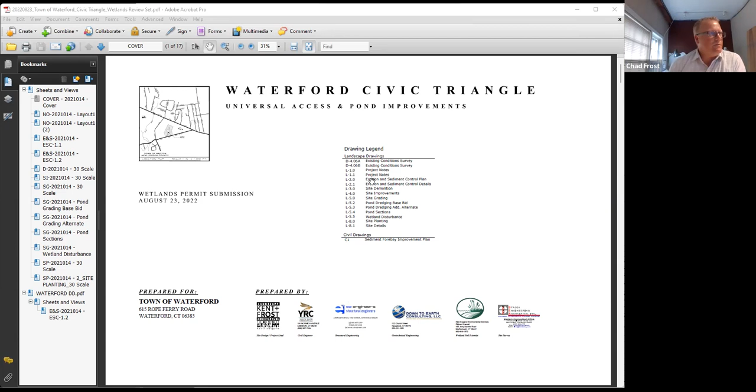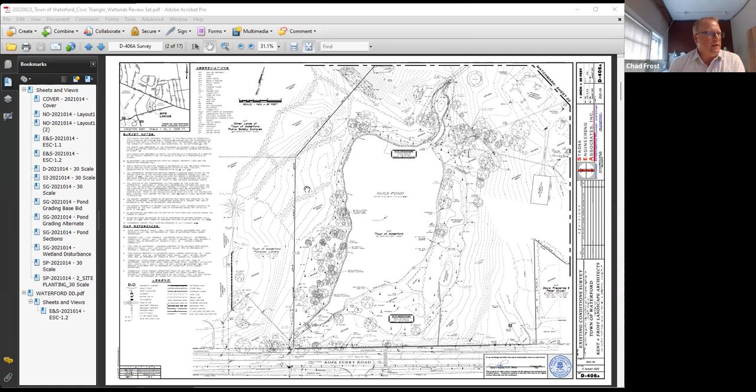These are the wetland plans that we submitted to the town back on the 23rd. That's the cover sheet, this is the survey, which you've seen, it's been updated since right before we were submitting. There was some additional information needed around the periphery, so the playground, the bathrooms, and some additional topo were picked up, which we needed for the submission. This is an additional piece of the survey, getting a little further up into the parking lot.

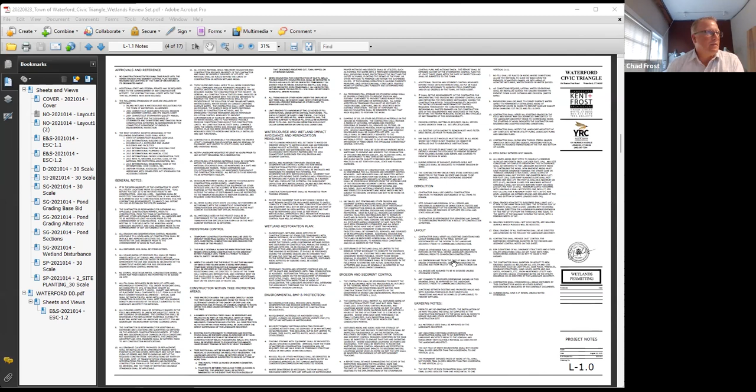We included a whole bunch of notes - I'm not going to go through all these, but there's everything from our typical general notes to pedestrian controls during construction, the tree protection plan during construction, the wetland watercourse avoidance and minimization measures, the wetland restoration plan, environmental best management practices, E&S controls, demolition, layout, grading. So a whole bunch of notes there that I'm not going to go through right now, but they're present, along with our typical legend of all the different symbols in the plan set.

What I'll do real briefly - effectively there's been very little change since the last time we met. Planimetrically, everything is where it was previously. The walks are the same. We've made a minor tweak where the walk connects to the playground for a grading perspective. The forebay we've talked about is still there, all the walks are there. It was really just a matter of calculating impacts and trying to minimize them and finish all the details.

This is our erosion and sedimentation control plan with all the different measures we're putting in throughout the place. What I'll point out on this plan, as we've talked about, is the moving of the muck, the dredging of the pond. As we start dredging, we're moving that muck to a first stockpile within the pond, then moving it to the secondary dewatering right outside the pond, and then taking it up the hill to its final dewatering area adjacent to the skate park and the police station, as we've discussed. So that's the three-stage move.

The other thing that might have come up since July, in our dewatering plan, before we had a silt sack to pump all the water through and deal with turbidity. We've now made this a much more robust settling detention basin. It's a 2-cell process, so the water gets pumped out of the pond, goes into a large settling area, filters through a stone check dam into a secondary settling area before eventually being released through 2 different measures back into the stream and going downstream.

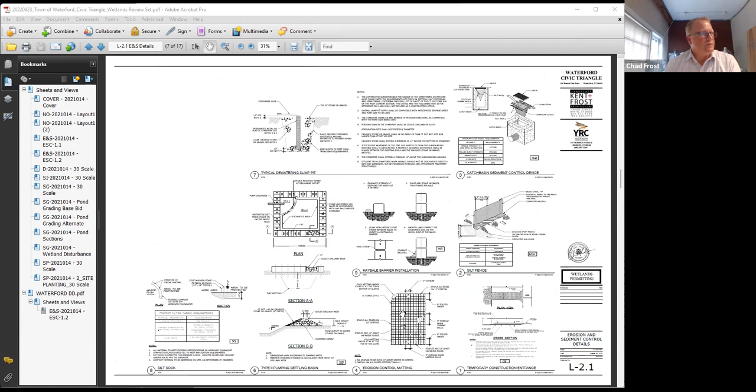Site demolition - again, hopefully nothing drastically new. All these hatched areas are where we're having to strip topsoil. All the X's are trees to be removed. This is the area next to the pond that's over vegetated that we're going to thin out and selectively remove the small and overpopulated trees to reduce the amount of vegetation falling and getting back into the pond.

And then you can just see kind of the area of influence. I'll note that we have noted - if I can zoom in a little bit, might make it a little easier for you. I can do that.

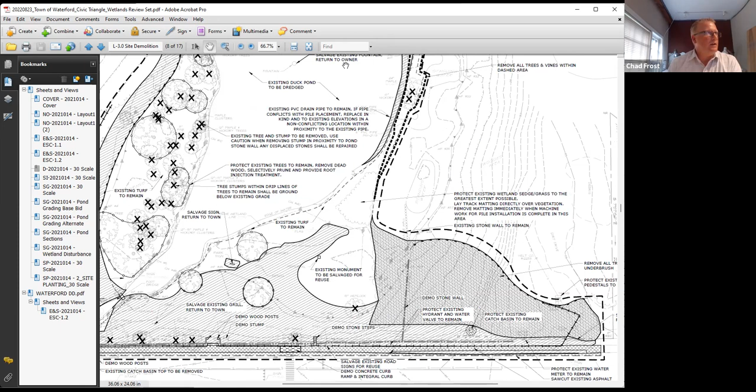The notes: there's the existing sign we're salvaging for the moment, the existing memorial, the monument that we're going to reuse and build back into the plaza down here. And this is the area where it's currently wooded, and we're going to be removing all those trees to improve the visual access. So again, I don't think anything new that we've talked about from a committee perspective, but just getting into the details of how we have to do it.

This is the improvement plan, similar to what you've seen effectively all along. There's just some more detail in here. I'll point out on the walkway down. So this is the playground. This is the existing walk to the bathroom.

So the walkway that now comes down the hill, we've added some drainage features along there because we do anticipate quite a bit of runoff coming down there. So we're accommodating that. We had some grading things to do down here, so there's some existing stone wall or existing large stones we're lining to make a stone wall to minimize the amount of grading we have to do. The boardwalk, the concrete path.

We've hatched some areas, that one in particular, and another one over here. These are the concrete areas where we have wetland soils below or adjacent to where the walk is doing, and we're just highlighting those because we are doing a little bit more of a robust base underneath of them so that we can make sure the soils support the walkway and we don't have settling issues down the road.

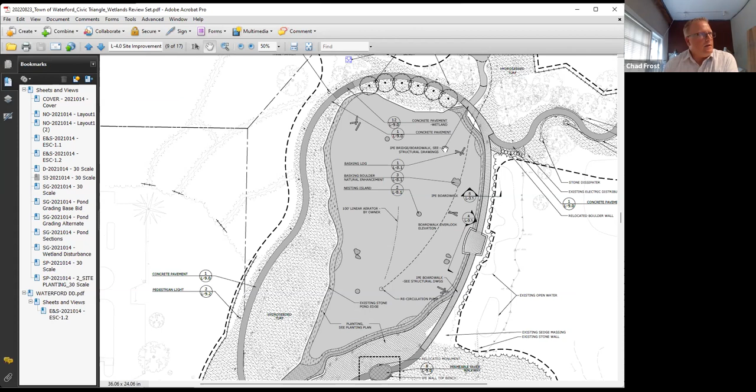And then the one new thing I'll point out, this came about in discussions with Rich Janarski, the wetland scientist. Within the pond, we've added some habitat restoration features. So we have these basking logs that we've set up a couple along the edge, both connecting to the edge of the pond as well as floated or stationed in the pond. These are for turtles, amphibians to be able to crawl up out of the water. Same thing with rock, and we've made some nesting islands for nesting birds to have a place of respite out within the pond.

Rich thought this would be a great addition as we did environmental improvements to the overall pond and water quality. We thought it was a great idea. We positioned quite a few of them, as you can see, kind of along the boardwalk, again for that visual and educational opportunities, thinking of how kids walking along the boardwalk would love to see the turtles and the frogs and everything like that.

The exact placement of this we will work out as we're actually doing the construction. Right now, we've pushed it far enough away to where we hope, for the most part, it's out of an area of disruption, so that if the turtles are basking on the log, it's not 2 feet away from the boardwalk and they're going to all flee. It's far enough out that they can continue to bask and the kids continue to watch them.

So that's kind of the only real improvement that we've made to the pond.

This is the grading plan. From a high level perspective, very little has changed. We got the additional grading that we needed up here to make sure we can make ADA access. From a committee perspective, what you should be aware of is this connects right up to the corner of the playground. It is fully ADA accessible, meaning below 5% all the way down this hillside, and the entire walk around it is really 1 to 2% for the most part. So very flat, very easy to do.

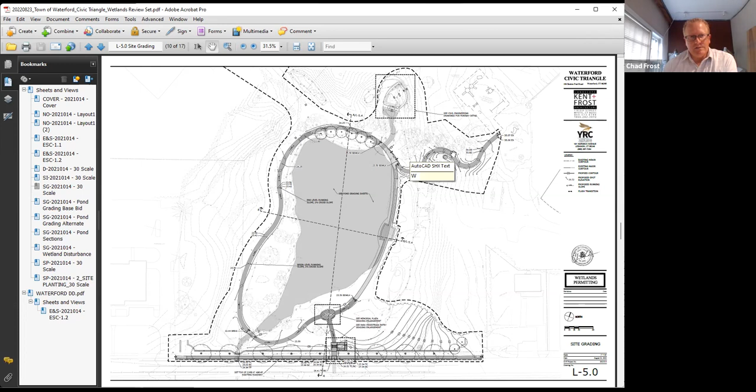Then we come across, we have a slight ramp up to get to the elevation of the boardwalk, and the boardwalk is level all the way across until it connects back. So the goal of attaining a universally accessible trail, we were definitely able to achieve and make that entire loop.

Otherwise, we did finalize the grading on this hillside. That's another potential thing that we finalized since we last saw the plans. There's a level area, a steeper slope, and then a softer slope down. We know we're going to disturb this whole area as we take out the trees and open it up visually.

This is where we're doing our construction staging and that sediment basin for the dewatering of the pond. So we've given the grading plan to make that a more even transition all the way down the hill, so visually it looks more appealing and it's easier for people to walk back and forth. This is where we expect, when this area needs to be mowed in the future, they can come in and go back and forth along that hillside much easier with this current grading plan.

The next two, this and the following plan, are the dredging plans for the pond. As we've talked about, because of budget constraints, we have our bare minimum of dredging, and that's this plan. I think you're all aware of the contaminated soil of the muck, this is that area we're leaving alone. So that's why the contours bulge out there, because that's the area we don't touch. This represents us scraping the muck out of basically the entire pond, a few inches here or there, depending on the base of the subgrade.

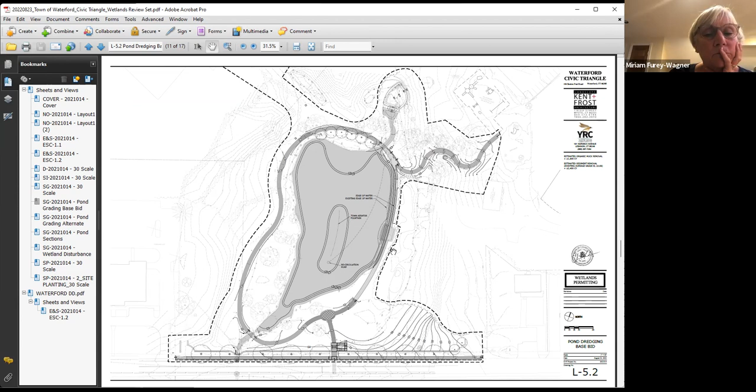Chad, who told you not to touch anything? That's our licensed environmental professional, the LEP, who did the environmental testing there. Just double checking who they was. Yeah, somebody who knows more about contaminated soils than I do. I was wondering if it was wetlands or somebody.

No, 100% based on that grid of testing that we did, and all the results that came back. Knowing most of that muck, what we found, just to refresh, was that it has some contamination within it that we can remove, but we have to handle it appropriately and dispose of it properly, meaning we can't just get rid of it on town property somewhere else.

And this was the one area that was recommended we just leave in place, and everything else, all the rest of the muck comes out, and then the bottom gets slightly regraded. I think it's where the lead is. No, it's not mobile the way it is.

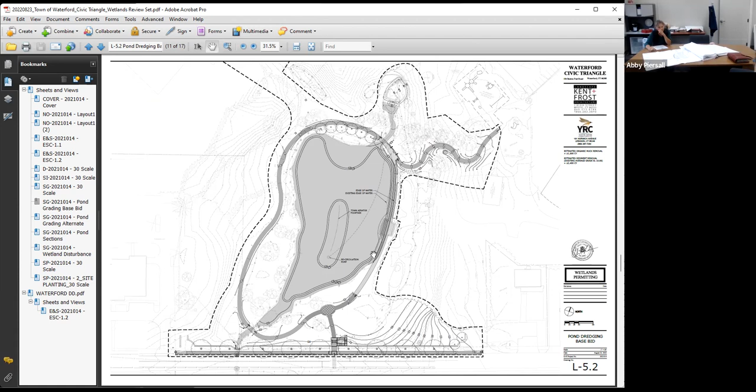So then, if budgets prevail and diesel prices drop and all that good stuff, this is the optimum dredging plan. I'll flip back to the other one. Again, you can see the shape. This is the optimum depth. Basically what we do is just expand that optimum depth out to here, so we get a much larger area of deep water in the center.

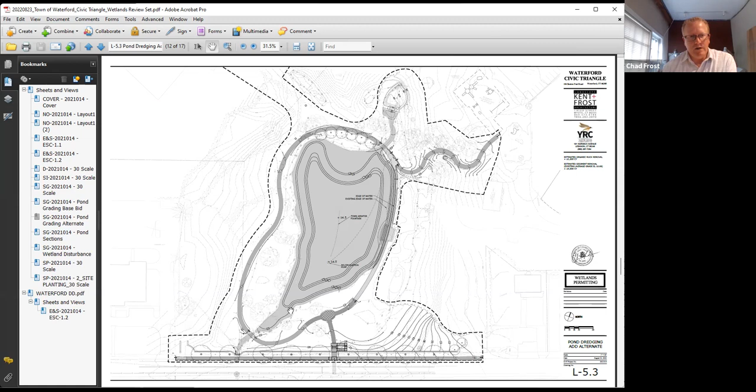Again, it's only about 6 feet deep, so it's not extremely deep, but it's deep enough to stay cooler. We do provide a shelf all the way around, so we have the first 5 feet we don't really touch. We take out the muck, but that's about it. Then we sculpt down. Then we have a shelf, which is right at that optimum level for aquatic plants to be able to live along that shelf. And then we go down another 3 feet to a little bit deeper water, and again have that aeration in the center.

So this would be the hopeful plan. We put it in there just so that the wetland committee understands that there's kind of an either-or scenario, so they know everything.

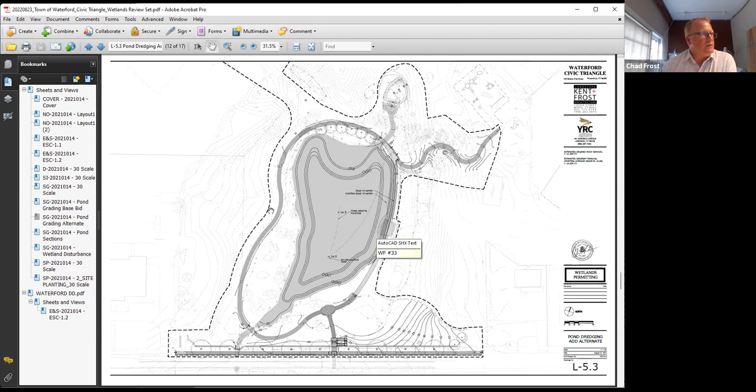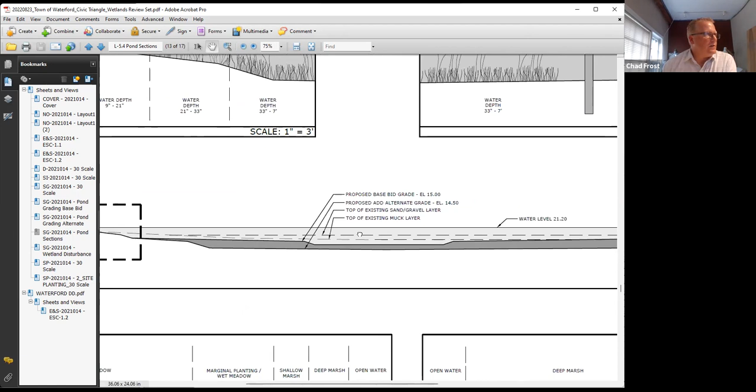These are our sections through the pond. I'll jump back, so we have a section cut right through here, and then another section going the long way. This top section is through the area over the pond, the little outdoor classroom. I'll try to zoom in a little bit so you can see the water level. That top dash line is kind of where we are today, the top of the muck layer. This is where we dredge down to, and you can see the deep area in the center. And then that darker gray bottom would be the full-blown plan, if we were to dredge it the full depth that we'd like to. So those are the different layers.

Both for that section, and then this is the long section looking north-south throughout, and we have the enlargements of how we want to do the shoreline condition and the different marginal areas of the water and what we'd be planting in those different zones.

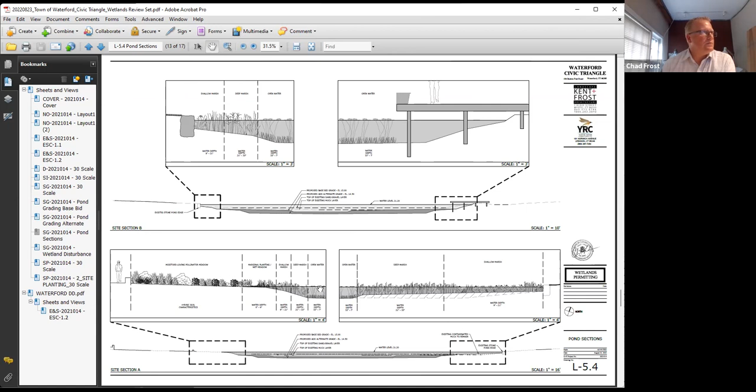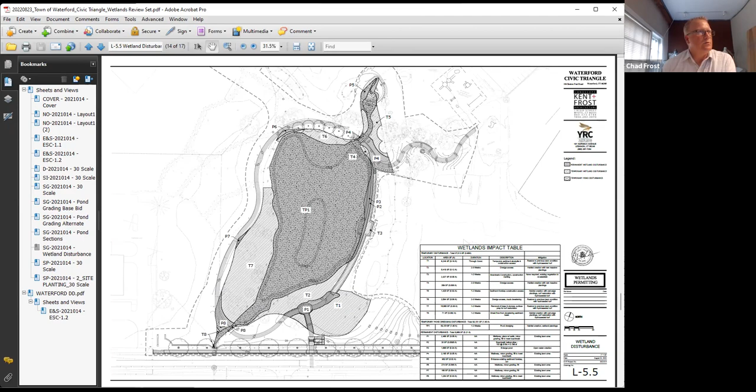So this one, what I'm going to actually do, I'm going to switch. This is our wetland disturbance area. This is what wetlands will care about the most. And I'm going to switch to our colored plan real quick.

Same plan, just has a little bit of color on it to help out, and we're actually probably going to add a little bit more color on it before tomorrow to make it easier for the commission tomorrow night. What we're looking at here is everything shaded green is a wetland soil, and the hatches on top of that green are the different disturbance areas. They're all labeled, as you can see, T5, P4, T4, and that's tied to a key down below so we can tell which is which.

Anything with a T is a temporary disturbance. Anything with a P is a permanent disturbance. And the commission, that's one of those things we have to tell the difference between a permanent disturbance to a wetland and a temporary disturbance to a wetland. So I'll zoom in and kind of pan around and explain.

Different areas, and I'll start down here because this is just where we had called things. Started one and we worked our way around the pond. Area P1, this is a permanent disturbance. This is the concrete walkway as it comes into that wetland area. Again, reminder, this entire area that was flagged as wetlands is an existing lawn today, and it is not a wetland of high quality.

It's basically just a wetland by soil and not by activity. The sidewalks come in on either side, and we minimized the amount of grading we had to do around them. Over here, as we had to ramp up to get to the boardwalk, this got a little wider because there's a little bit of fill necessary to get up. So that's the first area of permanent disturbance, and then we have a temporary area to either side of it.

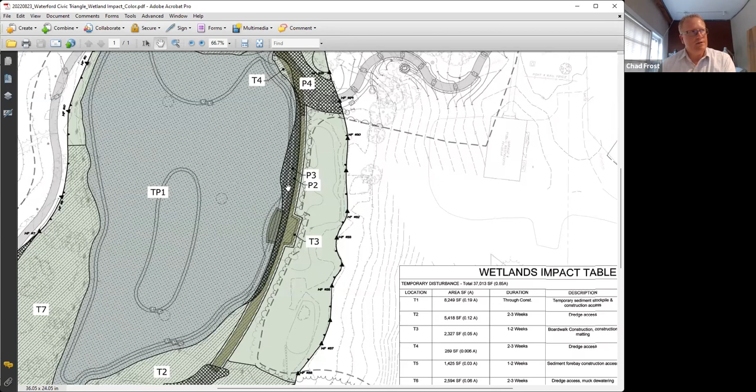As we go through there, there's an area called P2. Each of those helical piles, when we drive those in, that little six-inch circumference of pile sticking out of the ground when we're done is a permanent disturbance to the wetlands. So we had to classify and quantify every single post we have along here and add them up. That adds up to our P2 area of 20 square feet of helical piles touching the ground. So that's what P2 is.

P3, if you'll recall, we've talked about reshaping this edge of the pond slightly. It's wavy and non-uniform. We have a slight berm there from when it was originally dug and from machines going back and forth. We're smoothing that berm out so we can provide better access in and out of the water for amphibians, and we're realigning that edge to line up with the boardwalk, so that from an educational perspective, as people are walking down here, you get to experience actual wetland plants on both sides of the boardwalk. By the time you get out here, you have open water on one side and can see everything happening there, and wetlands on the backside to experience as we walk all the way along. So that P3 area is what is currently the edge condition of the pond, and it's going to become part of the pond when we're done. So a slight pond expansion there.

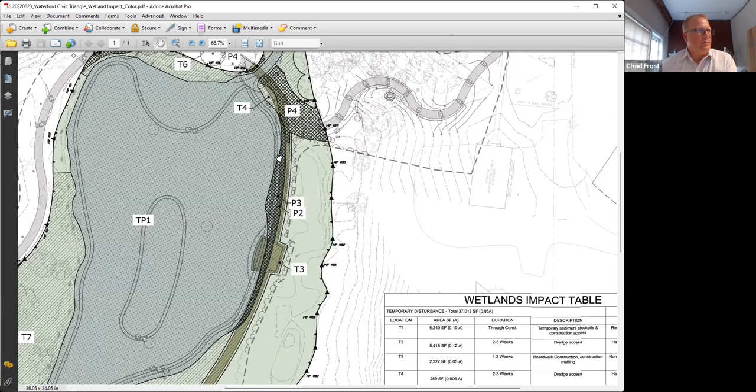This P4 area, again, there's some grading that has to happen as we come down the hill. We actually come all the way down, then have to come back up slightly to get to the elevation of the boardwalk, so there's some grading that happens along here. Additionally, on this edge of the boardwalk, we wanted the boardwalk to be flush with the ground beside it, so that if you're coming straight down the hill—this is all mowed grass under the trees—you could walk onto the boardwalk from the edge. So there's some grading that happens, and that P4 permanent area of disturbance is the grading that happens underneath the boardwalk and in order to get up to the boardwalk elevation. We also have a temporary disturbance adjacent to it because of the construction activity that happens around it.

Up here, and then a really small area, this P6 area, is basically where we have to put the footings in for the bridge on the far side. So a really small amount of area, but you have to have something for the bridge to rest on. There's a small area of disturbance there.

The T5 area, again, as we construct the new forebay up here, we have construction access that has to get up there. We know we're bringing machines in from both this side and this side. And as the machines track back and forth, because we didn't want to bring them through the playground or the gazebo, that's our temporary disturbance there.

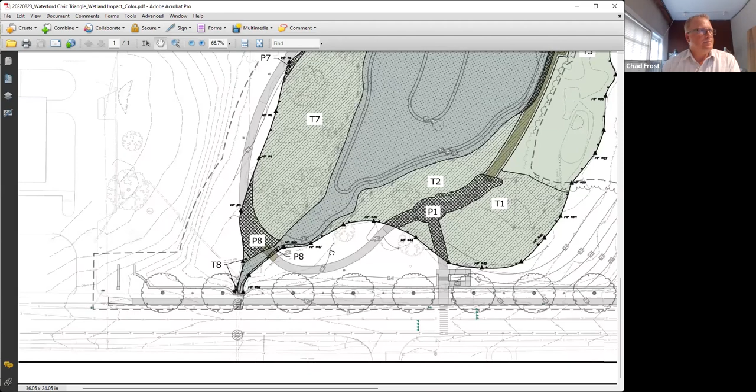There's some really minor T8 areas, minor temporary disturbances. This is just from when we put in that dewatering area for the pond. There's some wetlands that area will flow through, so there's a minor disturbance there. On this side, that P8 area, a very small amount, again for the footing construction for that bridge as we come across. So those are all the temporary and permanent areas of disturbance around the pond.

And then obviously we have the pond itself as a temporary disturbance. We can't dredge the pond without disturbing it, so we count that as well.

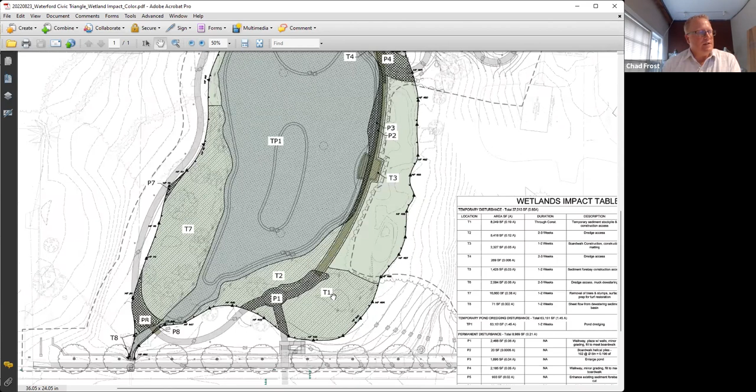One thing I would point out is it looks like a lot of disturbance. It is a high number. However, it's what's necessary in order to make the environmental and access improvements for this project. When we were hired a while ago, the charge you guys as a committee in the town gave us was to design a universally accessible trail around the pond and make environmental improvements at the same time. We've done our very best to stay outside the wetlands with anything permanent that we can. We've minimized where we possibly can, and we've tried to do it as environmentally responsible as possible.

Most of these disturbances, the numbers look high because they're existing lawn areas now, and there'll be lawn areas when we're done. We really do think we're making an overall improvement to the environment, both from a water quality perspective and a wetland quality perspective by the time we're done. But the only way to make those improvements to a wetland is to do disturbance within those wetlands.

Chad, can you go over P5? Did we miss that one at the top?

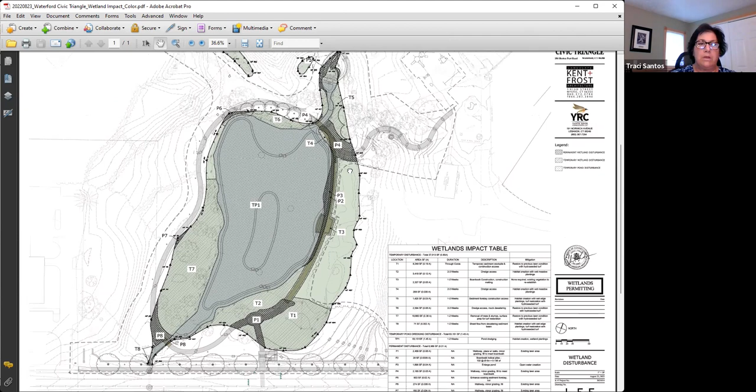That's the P5 area all the way up here, that hatch again is the existing forebay. That's where the sediment basin is, where the pipes come in from the road. There's an area of wetland flagging inside of that area.

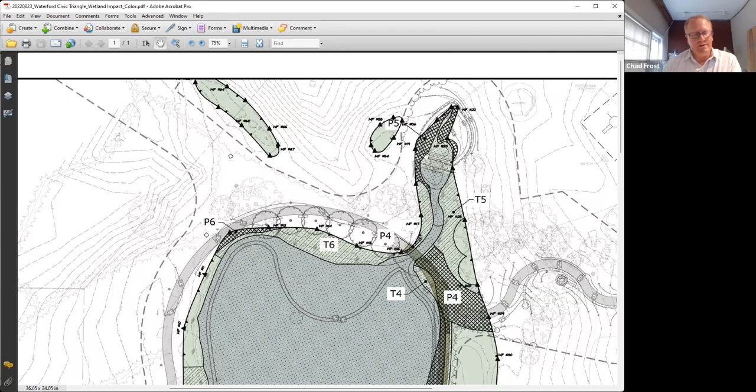As we hog it out to enlarge it so it can function properly, those wetlands have to go away. It's 100% a man-made thing. The town has a standing permit to maintain this, go in and pull out sediment, so that area gets disturbed regularly anyway.

If anything, when you hear from the public it may look like a large number because there is quite a bit of area. I'd focus on the fact that most of it is lawn areas being returned to lawn. We've really minimized the permanent disturbance where we can.

Without doing these minor disruptions we need to, we couldn't do a universally accessible trail around the pond, and you couldn't even do a trail around the pond at all. The whole point was to allow the public to get down to the pond. Right now a mom with a stroller can't get down there. So when we talk universally accessible, we think of handicapped people in wheelchairs, but it's for all residents being able to get from here down and all the way around.

I wanted to point that out so you're clear, in case you get questions from people on the street about what you're doing and it makes sense. I'll stop there and jump back real quick to finish the last couple sheets.

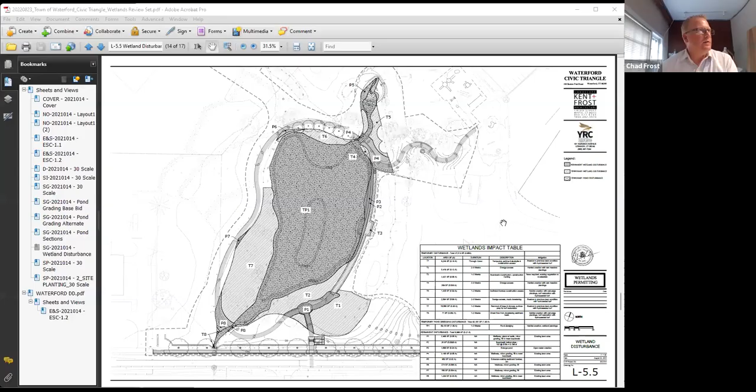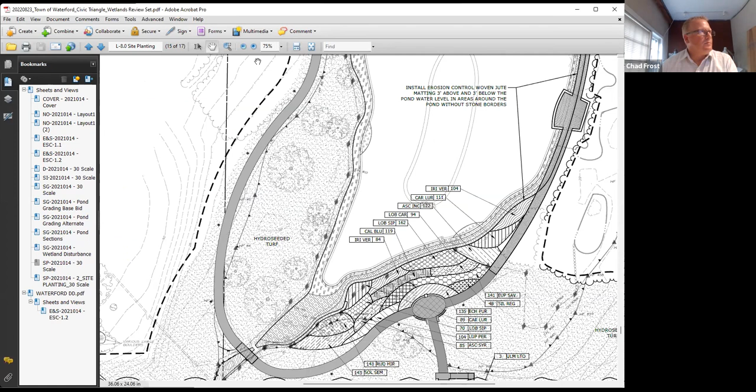The only new thing here is we've identified all the wet pollinator meadow plants and how we're going to plant them, consistent with how we've discussed it in the past - planted in large swaths. Zooming in, the plants are in large areas. This isn't a meadow where everything is mixed together like an abstract painting - this is big swaths of color.

This way, as Public Works maintains this down the road and they see the lobelia, this red flower, they'll know that anything not this bright red flower in that area is probably a weed and can be removed. The same goes if we get volunteers who love this and want to maintain it - it's a lot easier to have one large area of a plant that's supposed to be there, as opposed to everything mixed together.

These have been arranged so that more moisture-loving plants are closer to the pond, and more dry-tolerant things are closer to the walk. We also have some color - echinacea and things like that - along the walk. Most of this is in the 2 to 3 foot high range so you can see over it, hopefully making a nice palette of color through most of the blooming season.

Most likely in the winter, the whole thing gets mowed down to the ground annually to keep woodies and invasives from coming in. We also have these zones along the edge of the pond.

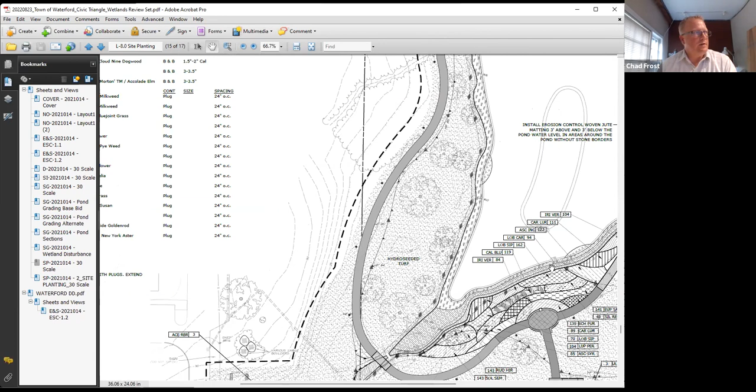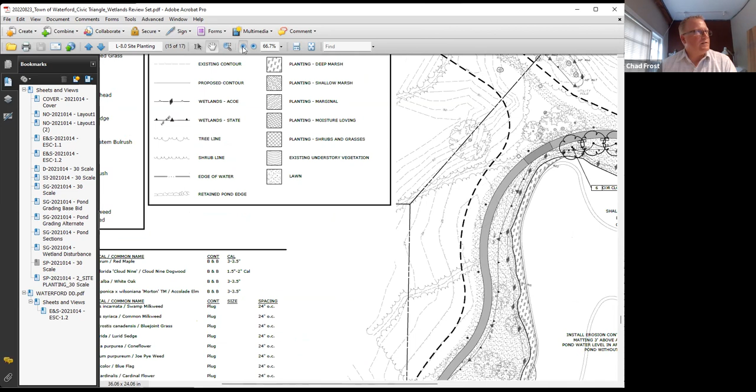They correlate with these zones and plant lists, so that as we finish regrading the pond and it starts to fill back up, we have a planting plan for that edge condition to revegetate it with native plants along the edge.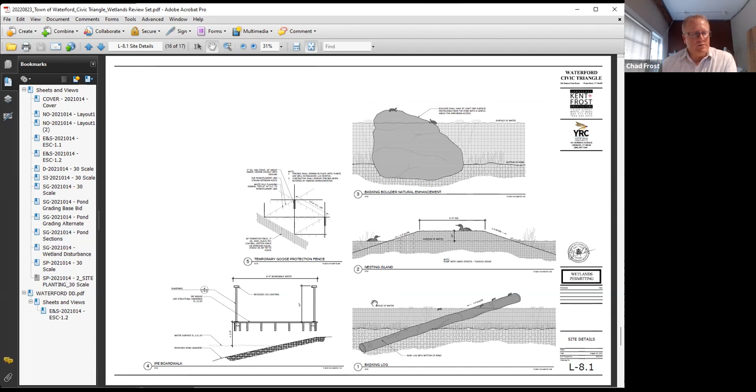We have thrown in some details for temporary goose protection. That is one of the issues we'll have as we plant everything along the fringe, trying to make sure the geese don't come in and rip everything out that we just planted. Thank God, they're horrible. It won't look great and people will probably complain, but it's what we need to do to protect it.

And then this is our engineer's plan for the forebay reconstruction, the enlargement, and how it's going to operate with some check dams and spillways, the filter berm, and some of those details. So that's the whole set we've submitted.

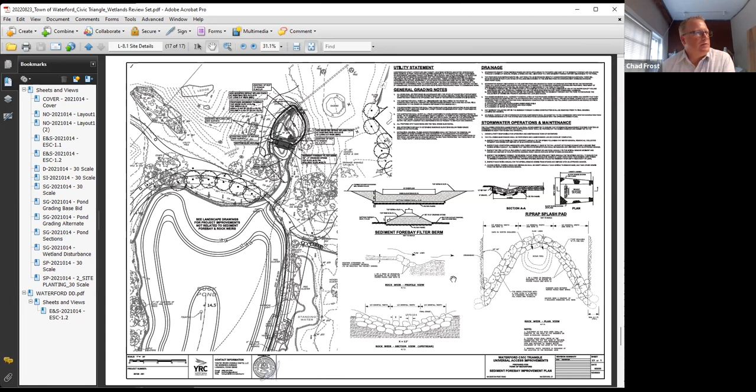Does anybody want to see a particular sheet again? Otherwise I'll stop sharing and we can talk about schedule and big picture things. Anyone? I'm all set. Okay, me too, Chad. Good. Oh, did we lose Chrissy?

Yes, it looks like we did. She said she could only stay a half hour. Oh, I talked to her. Are we still legal? Yeah, Jody's a member of the group. Oh, Jody, perfect. We had 4 before now.

So, to give you an idea for tomorrow night, we obviously submitted these plans. Our first official meeting with the commission is tomorrow night. I'll be there, Rich Snarsky our wetland scientist will be there, and Brandon our civil engineer will also be there.

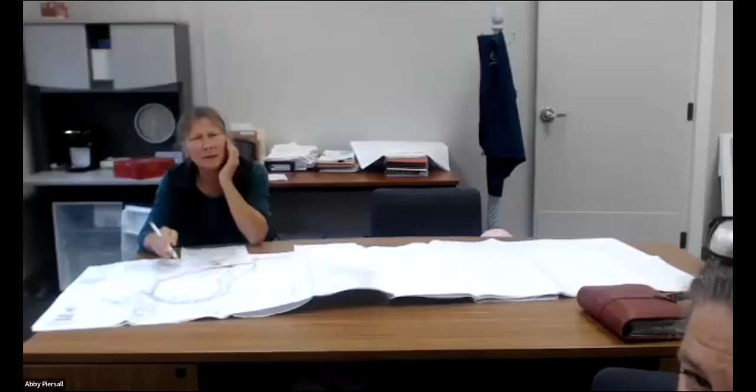Ma'am, I don't know if you want to say anything. I'll talk to Maureen tomorrow about what she wants from me for a statement, a short statement. Maureen, where is it going to be? In the auditorium. Okay, so you didn't move it over to the high school. No, this is not the public hearing yet, so I don't know if you even need to make a statement right now. Okay, I think I'll talk to you tomorrow.

I'm going to come anyway, just to watch. Show support in the audience, yeah.

So our general outline is: I'll do the introduction, the overview, and the project intent, and go over what the town hired us to do. We'll have Rich Snarsky go over his impact report. We got a statement from him and we're asking him to elaborate on it a bit during the meeting tomorrow night. Then Brandon will go through the technical aspects of both the wetland application and the engineering behind everything. And then we'll answer questions from the commission.

We'll be trying to make the point that there is no significant impact or loss of wetlands, and that the wetland functionality and wetland value hopefully improve through this project. That was the goal of the project, even though it does look like there's disturbance that it takes to get there.

There is the likelihood that we'll want to go to a public hearing on this, and that's up to the commission. We'll say that we're very happy to do it, happy to be involved and have the public come in and have public input. It's a little bit of a debate whether we directly ask for it or let and see how it goes with the commission and invite that.

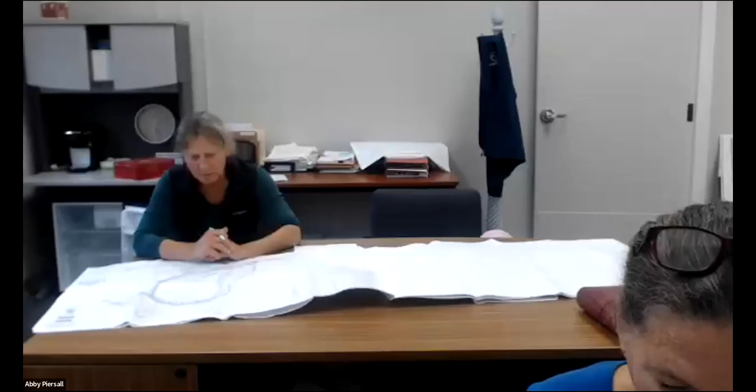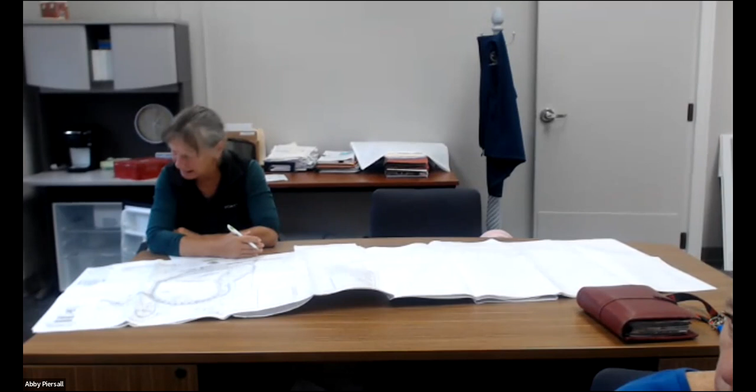Maureen, what do you think? I think they're going to hold a public hearing on something like this, so it's really a matter of when. As I advised Chad and Brandon today, make certain they identify what is temporary versus permanent areas, and how much is restored. That number is up to like 9,000 square feet. Once you get through, then we're going to plant it. I think when you look at sheet 8, the site planting plan, and get that big area where the trees are taken out off of it, that number will substantially decline, which would be good.

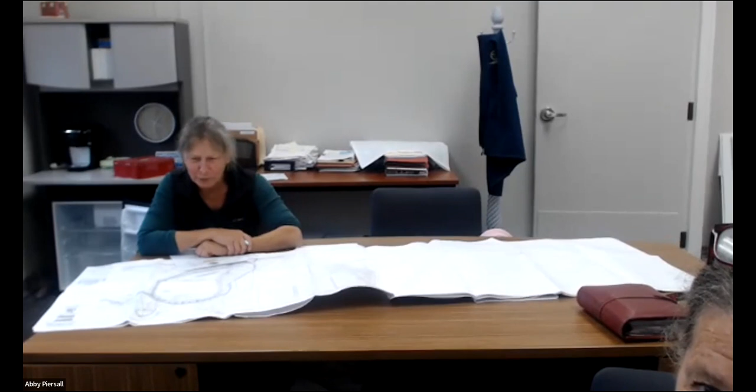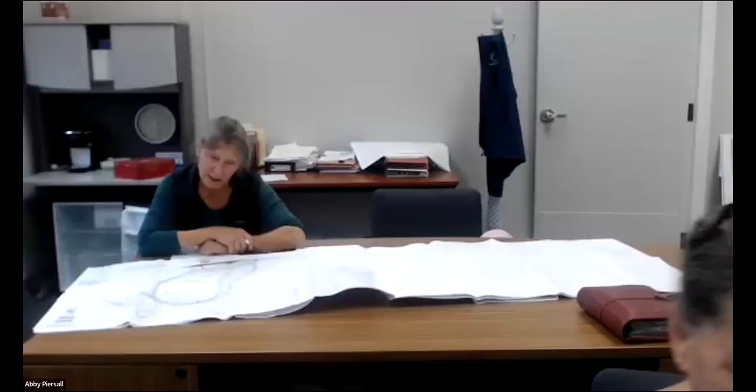Well, the crazy part is it's not a healthy wetland now, because we're leaving a ton of pollution in it. But as I said, Chad phrased it well: it takes work in the wetland to improve the wetland, and so much of the work being presented to the commission is temporary in order to dredge it, restore it, and replant it. That's the key - restore it, make it better. And the benefit is public education, public access, and habitat. Then the commission can weigh the impacts, long-term and short-term, against the gains and benefits for the waters of the town of Waterford.

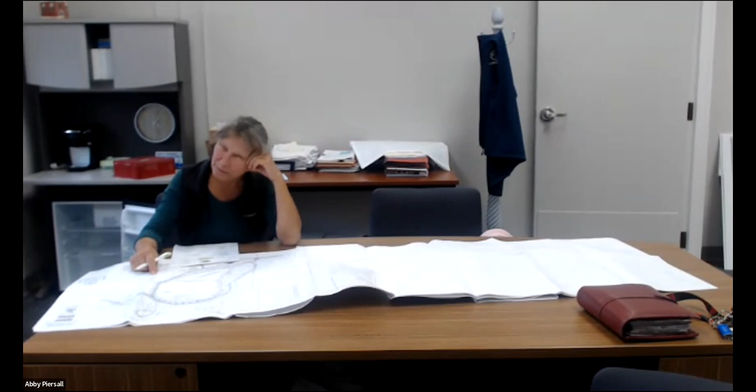Their preliminary presentation happened, and we had maybe 5 or 6 people last meeting, just at the intro. No, nobody in the audience. In the commission, they were enthusiastic about the project.

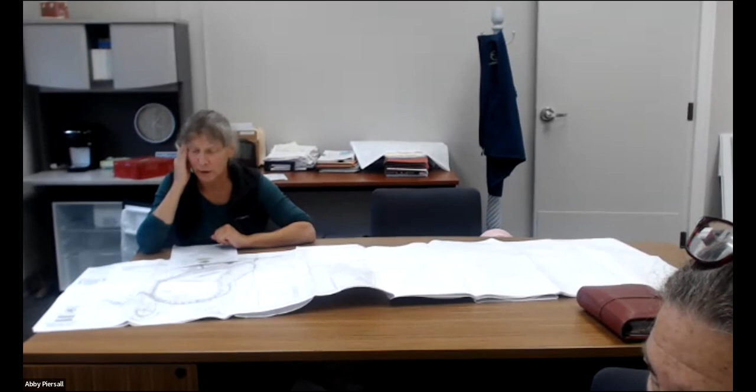We talked about that there might be some people who show up eventually for a public hearing. When we go to public hearing, it'll be noticed, and one of the recipients of the notice will be the condos across the street. Also, I think there are people that signed that petition. Did you look into that, Mem?

I did look into the petition. I don't think they had all the facts either. I've contacted some of the people on that list that I knew, so, we're in a public meeting, I'm not gonna say any more. But I don't think a lot of those people are gonna show up for the public hearing, is my understanding. I could be surprised.

The good thing about the public hearing is that this is the only opportunity folks are gonna have to comment on the plans themselves. We've had a lot of public involvement relative to the master planning effort, the 824, the Board of Selectmen endorsement, but this is their one chance to see it and say something before it goes to bid and potential construction. So it's a good opportunity to answer questions and get the word out too.

Yeah, we welcome the opportunity to have the public hearing for sure. I think it's a great opportunity to put it out there and hopefully get people to show up and learn more about the project.

So to that end, with the public hearing, there will be some scheduling elements that come into this because of the commission's schedule. There are other public hearings and other projects that will be taking up some of the regular meeting time. So it's possible that after tomorrow night, there will be a special meeting or a particular schedule laid out by the commission, and as soon as we know what the commission does with that, Maureen can be in touch so you're aware of the timing.

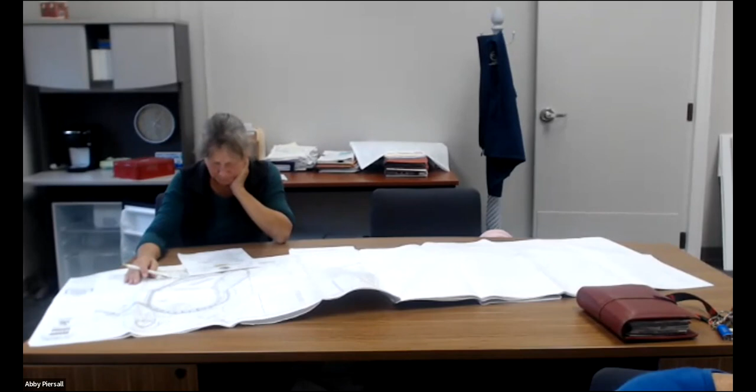So let's say that we get through that process, we get to the public hearing, they rule in our favor, let's say, just say. What's the next step after that? Do we go out to bid after that? We have to go through the public hearing first. Public hearing first, then we still have to address Army Corps permitting.

Chad is going to take us through the efforts to contact, perhaps have a meeting with the Corps representative to go through the project and see what level of review we're really going to be required to have. The person who will be assigned to this project was on leave through August 30th, and obviously Labor Day is out too. So we're just getting that contact solidified so we can get a date hopefully on the books for the Corps and for DEEP to have a conversation with Maureen and Chad and the team here. That will also give us some direction.

And that goes back to the phasing—that's concurrent, it doesn't have to happen after. Correct, concurrent. Good, all right.

So we have the local wetlands approval we need, then we need the DEEP and Army Corps approval. And while we're doing all of those things, we're also still finishing the construction drawings of the whole park—these are our permit drawings. They're 90% there, but there's just more detail we have to continue to work out.

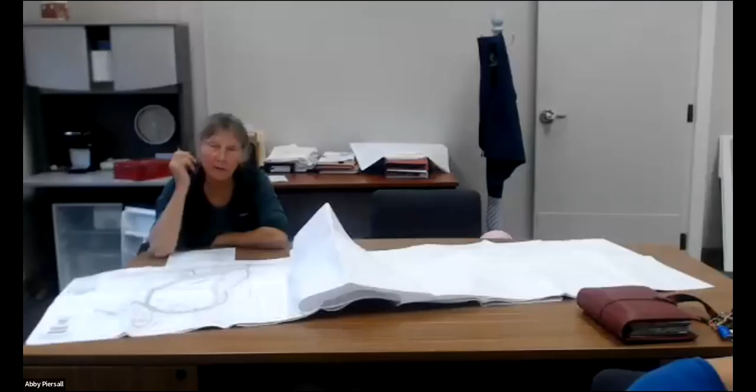So Maureen, I'll see you tomorrow night. If you decide you need me to say something, just give me a call or send me an email during the day. If not, I'll keep my mouth shut unless they ask. Again, it's up to you - work with Chad, he may want to just introduce you as the chair. Yeah, that's fine, I'll be there. I'm happy to do that just because you are the owner, right? Yeah, this is not my project - I'm not the owner, we're working for you as the committee and the town, and I think it's important that they know that.

Okay, I'll be there with bells on.

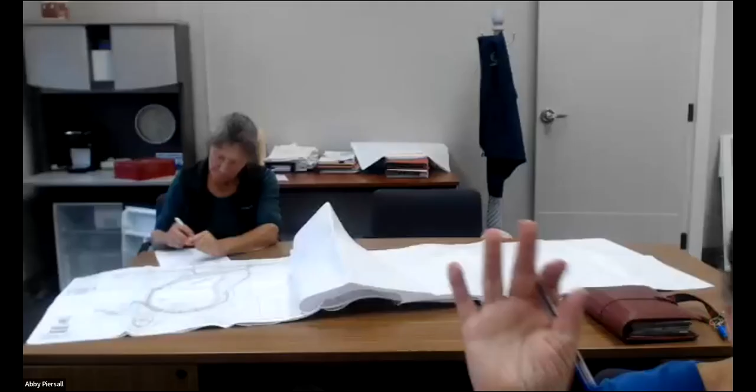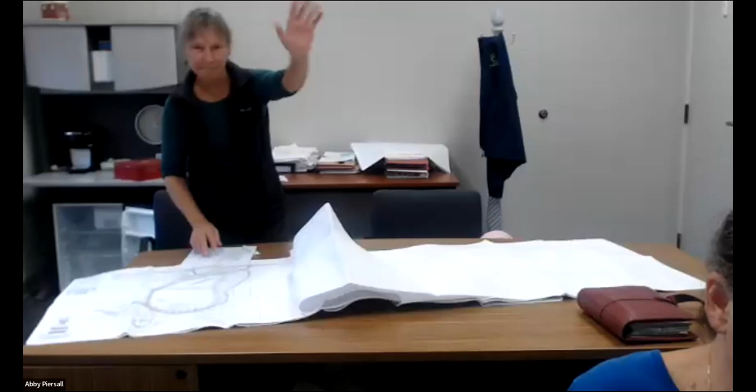Good night everybody - when are we going to meet again, do we know yet? No, we haven't set a date yet. If you want to get something on the books we can, or we can wait to see the schedule of the public hearing first, then we can always set the meeting either right before or right after it. All right gang, have a good night. Thanks, good night. Hey guys, thanks Chad, good night.